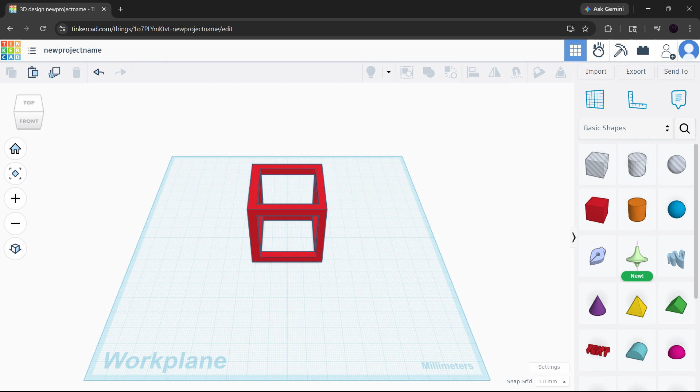Today, I'm going to show you how to work in Tinkercad, step by step, so you can go from a blank workplane to a finished 3D design with confidence. Tinkercad is one of the easiest tools for beginners because it uses simple shapes, smart shortcuts, and a very visual drag-and-drop workflow. The best part is that once you understand the core basics, you can start building almost anything by combining shapes, cutting holes, and adjusting sizes precisely.

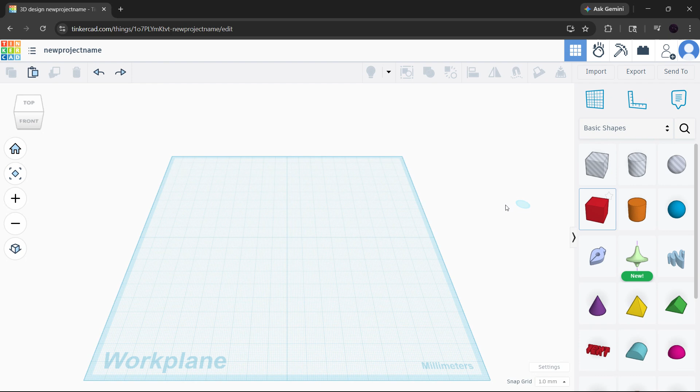To add a shape, go to the right side panel and drag any solid shape onto the workplane. For example, you can drag out a box if you want a base, or a cylinder if you need a round feature. Once the shape is on the workplane, you can click it to select it and begin editing.

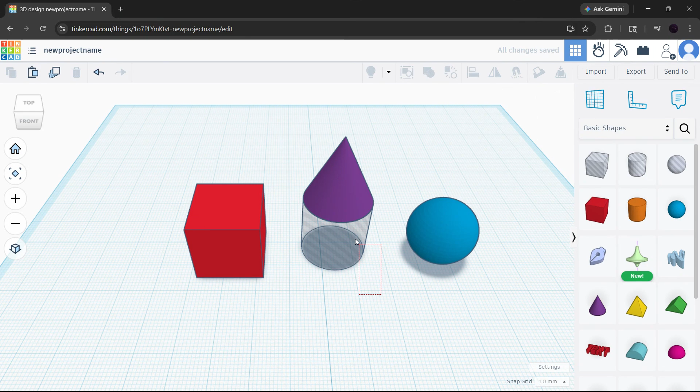Now, if you want to cut a shape out of another shape, that's where holes come in. Select the shape you want to use as the cutter, then change it to hole in the inspector window at the top right. Holes are one of the most important parts of Tinkercad because they let you create openings, slots, and custom cutouts very quickly.

After that, select both the solid shape and the hole shape together, then press Ctrl+G to group them. This is the magic step. When you group shapes, Tinkercad combines or subtracts them depending on what you selected. Solid plus solid becomes one larger object, while solid plus hole creates a cutout shape. That simple concept is the foundation of most Tinkercad modeling.

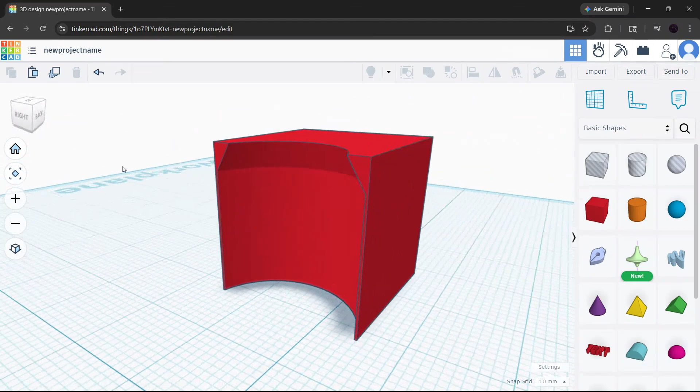Next, let's talk about moving and resizing your shapes. To move a shape, just click and drag it across the workplane. If you want to move it up or down along the vertical axis, use the black cone on top of the shape. This is especially useful when you're stacking objects or aligning pieces at different heights.

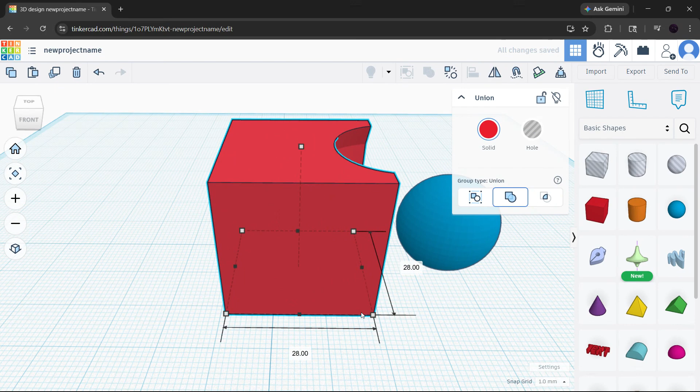To resize a shape, click it and drag the white squares on the corners or edges. If you need to keep the proportions perfect, hold Shift while dragging a corner. That is a great trick when you want a circle to stay a circle or a box to scale evenly without distortion. You can also rotate shapes using the curved arrows that appear when a shape is selected. Rotation is useful when you want to angle parts, align pieces differently, or build more advanced designs.

Now let's move into a few tools that can save you a lot of time. First is the ruler. Press R and click on the workplane to place it. The ruler lets you type exact measurements for size and position, which is much more accurate than dragging by eye. If you want your design to match real-world dimensions, the ruler is one of the most useful tools in the whole program.

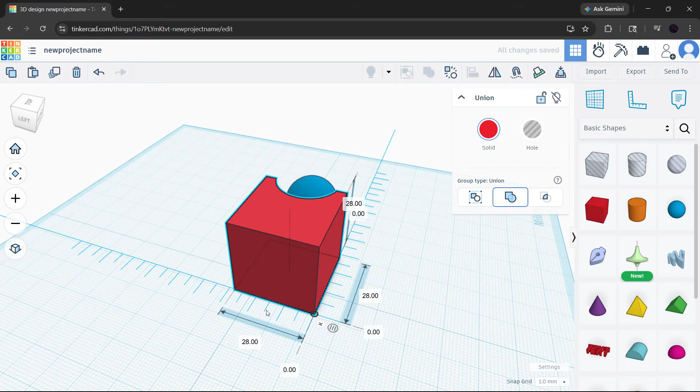Another major time saver is duplicate. Press Ctrl+D to make a copy of your selected object in the exact same spot. Then if you move the copy and press Ctrl+D again, Tinkercad repeats that movement. This is incredibly helpful for making evenly spaced objects like stairs, patterns, rows of holes, or gear-like designs.

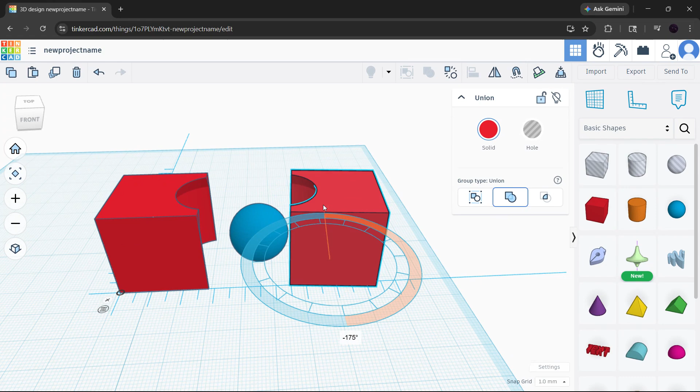The next tool is Workplane, and it's another favorite. Press W, then click on the side of a shape to place the workplane there. This basically sticks your floor to that surface, which makes it much easier to build on angled or vertical areas. If you've ever wondered how people build directly on the side of a part, this is how they do it.

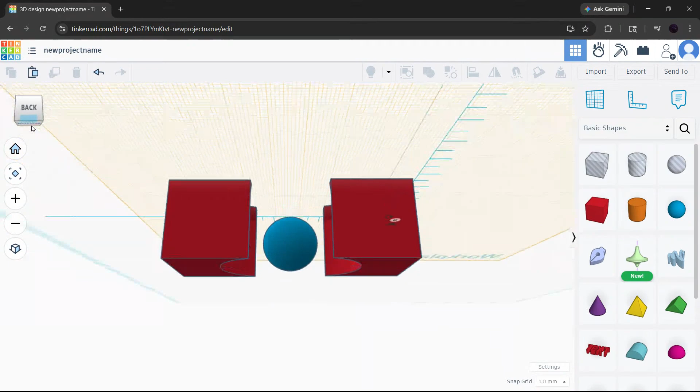Now let's go over navigation, especially if you want to work without relying too much on the mouse. To rotate your view, click and drag the view cube in the top left. That helps you quickly see your model from the front, top, side, or any custom angle. If you need to zoom in or out, use the plus and minus icons on the left toolbar. And if you want to focus on one specific object, simply select it and press F. Tinkercad will zoom right in on that shape so you can keep working without searching for it on the screen.

Finally, once your design is complete, you'll want to export it. Click the Export button in the top right to save your file as an STL for 3D printing. If you want to use your design in another program or share it as an image, you can also use Send To. That gives you options for exporting your work to other tools like Fusion 360 or sharing a picture of your design.

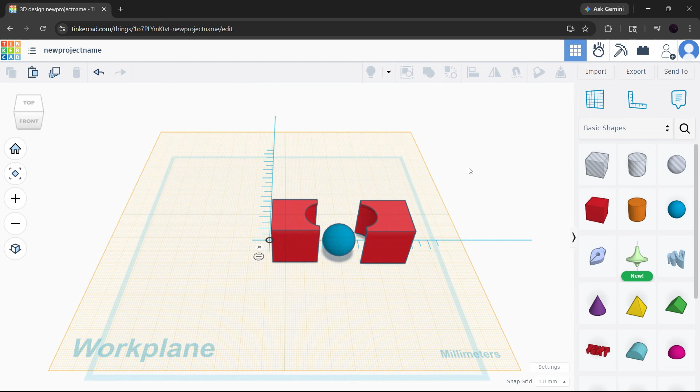So to recap, the core workflow in Tinkercad is simple. Add shapes, turn some into holes, group them, resize and rotate as needed, use the ruler and workplane for precision, and export when you're done. Once you get comfortable with those basics, Tinkercad becomes much easier and much more fun to use.